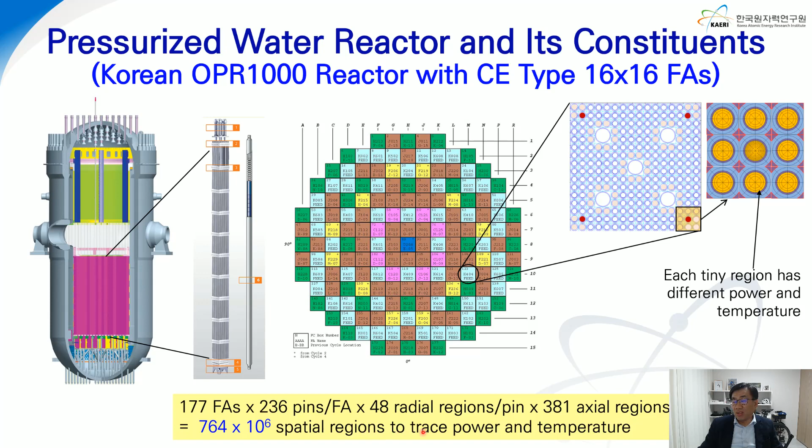The power and temperature distributions are determined as the result of the interaction between several physics phenomena occurring in a reactor. Nuclear reactions including fission, scattering, heat transfer in the fuel and coolant, thermal expansion of structural materials, and material degradation involving corrosion occur, mutually affecting each other.

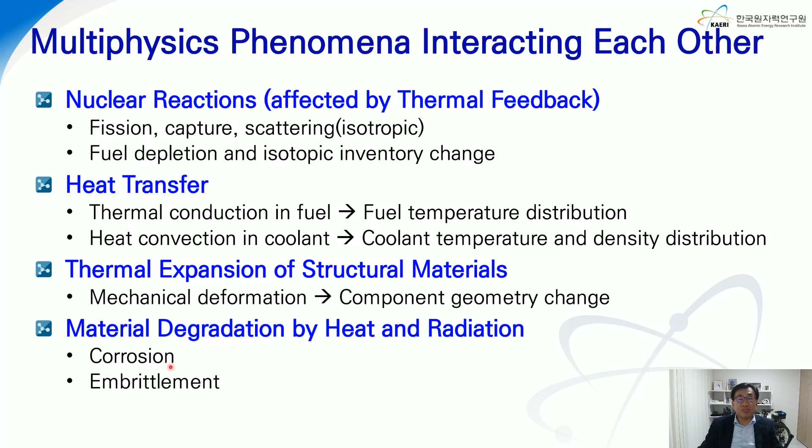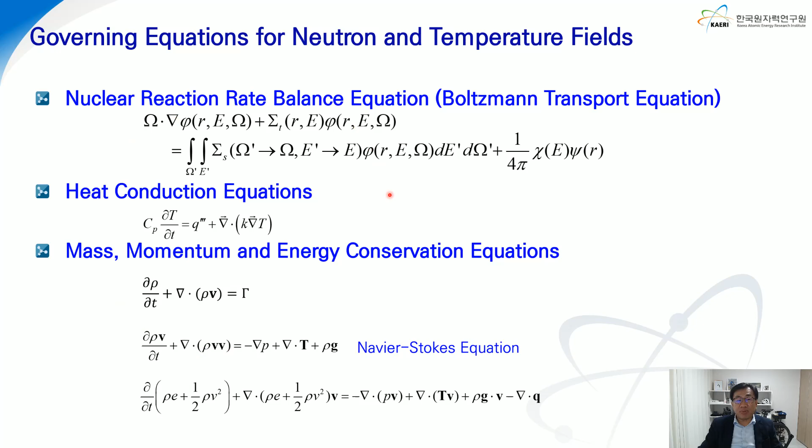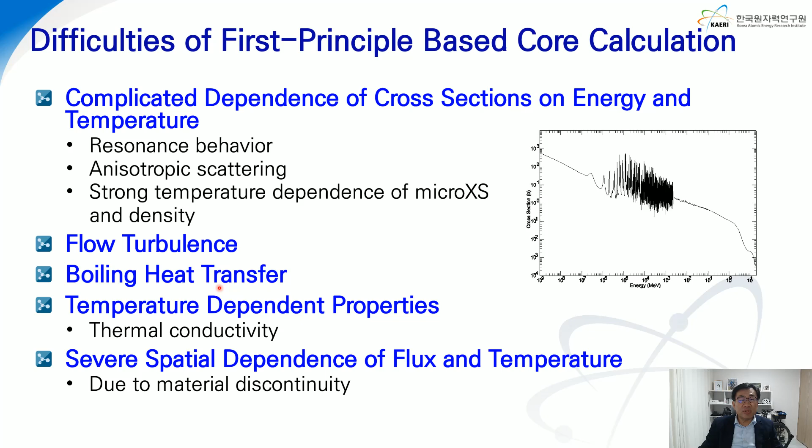The first principle-based core calculation is, however, very difficult because of several reasons. The most important reason is the complicated dependence of cross-sections on energy, as demonstrated by this resonance behavior. The macroscopic cross-section is affected by temperature through the strong temperature dependence of microscopic cross-sections and material density. In coolant, flow turbulence and boiling heat transfer make it difficult to solve the Navier-Stokes equation as is.

Therefore, several approximations and simplifications were introduced in the conventional reactor calculation. Multi-group approximation of the cross-sections, homogenization of materials in the unit of assembly, and diffusion approximation were introduced to the neutronics side. On the thermohydraulics side, various empirical correlations such as the Dittus-Boelter equation for heat transfer coefficient, drag coefficient, and turbulence mixing coefficient were introduced. Therefore, prior experiments were essential to generate these correlations.

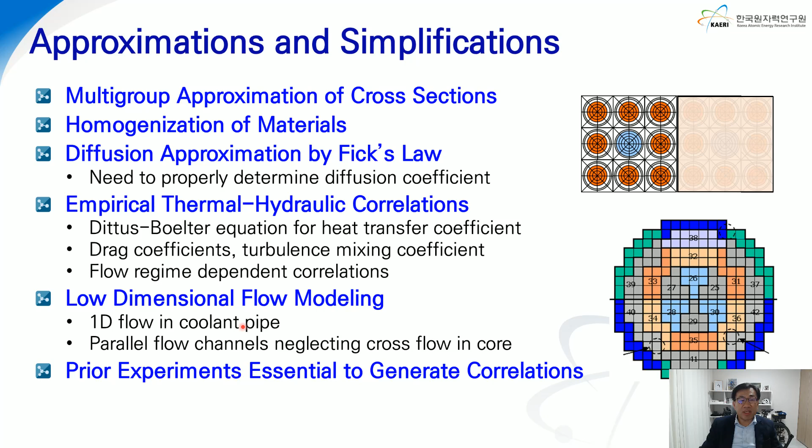In addition, simplification of the flow as 1D flow is introduced not only in the coolant pipes but also in the core as parallel 1D flow channels.

The PARCS code, which I wrote when I was a graduate student at Purdue University back in 1995, was a typical conventional reactor simulation code based on these approximations and simplifications. Even though the code was based on the two-group neutron diffusion equation, the solver must be good for accurate solution and for fast execution.

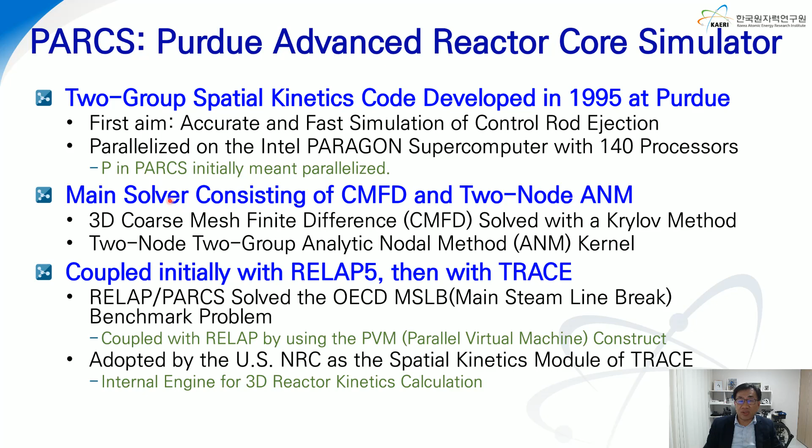This is the result of the PARCS calculation for a control rod ejection benchmark problem. It shows that the reactor power approaches the asymptotic level after the power pulse due to the strong Doppler feedback associated with the rapid fuel temperature rise.

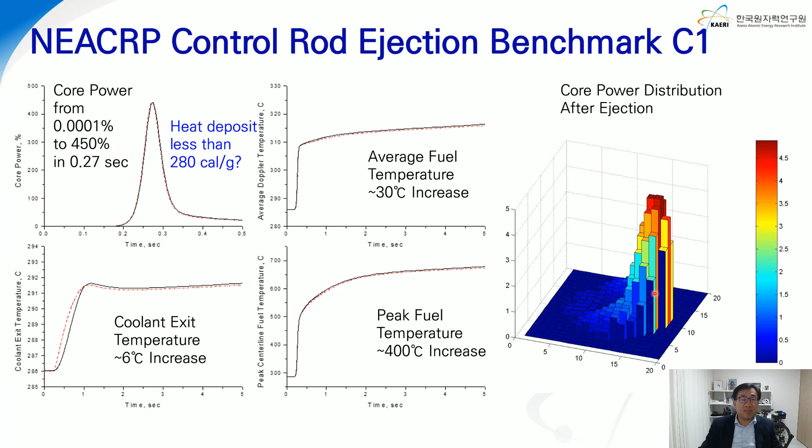This is the core power distribution, which shows a very high peak at the ejected rod position. It is noted that the power distribution is shown in the unit of core assembly, not pinwise, because each assembly is represented by homogenized cross-sections.

In 2002, it was possible to obtain a detailed sub-pin level power distribution through direct whole core calculation, which does not involve any homogenization. At the time, I led the Numerical Nuclear Reactor project as the Korean side PI of an INERI program. This project was to challenge the first principle-based core calculation by solving the Boltzmann transport equation directly for the whole core, exploiting the parallel computing power of Linux clusters. The product was the DeCART direct whole core calculation code.

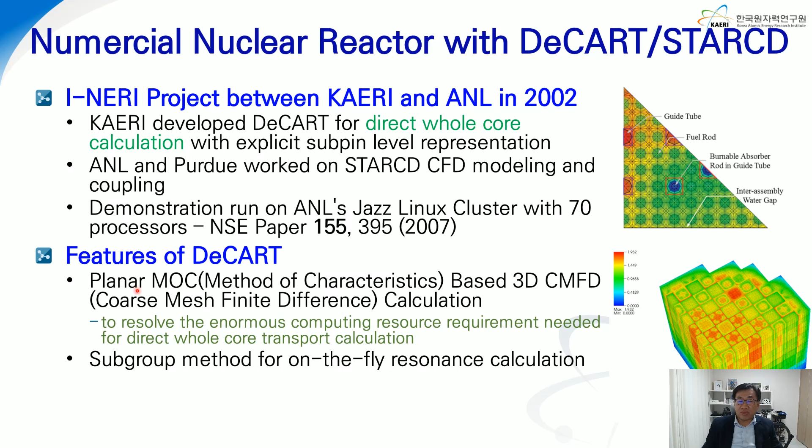Although direct whole core calculation was intended, the solution of the Boltzmann transport equation for the entire 3D domain was not possible because the computational burden is too high.

Therefore, I introduced a novel idea of performing the transport calculation for each plane by using two-dimensional MOC, namely method of characteristics transport solver. Each 2D transport solution, which is obtained with explicit sub-pin level geometry, is then used to generate pin homogenized cross-sections for each plane.

Then the 3D problem is solved with the pin homogenized cross-sections in the coarse mesh finite difference framework, namely CMFD framework. This method was named the planar MOC-based 3D CMFD calculation scheme. This was a breakthrough method that enabled direct whole core calculation on the Linux cluster at the time.

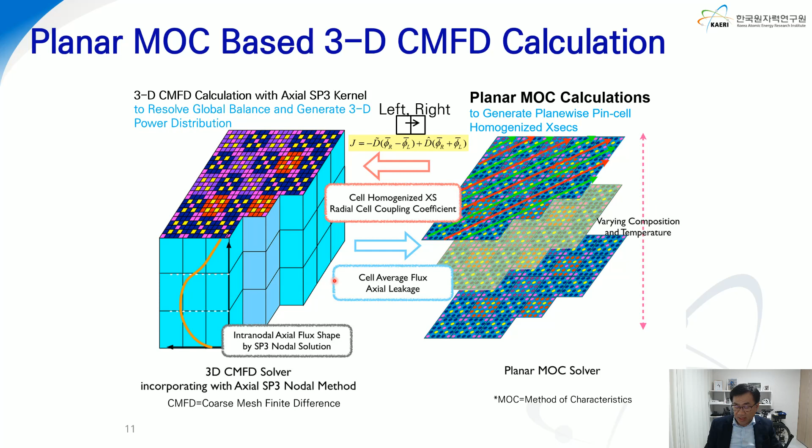Later, this method was adopted in the MPACT code, which was the direct whole core solver of VERA, developed by the CASL project. CASL project was a U.S. government-funded big project for high-fidelity multi-physics reactor simulation.

The term virtual reactor, instead of numerical reactor, was first used when they constituted VERA by combining the MPACT neutronics code, the CTF thermohydraulics code, and the MAMBA water chemistry code.

VERA demonstrated impressive performance in the simulation of so-called crud-induced power shift, or CIPS, of the Watts Bar Unit 1 nuclear power plant.

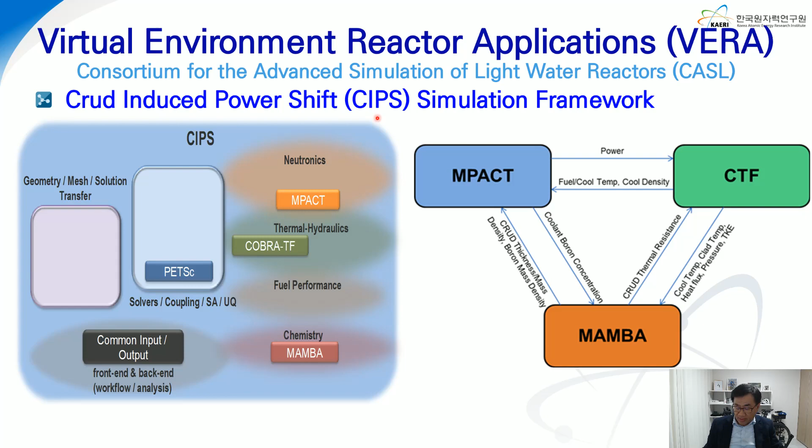In cycle 7 of Watts Bar Unit 1, it was observed that the axial power distribution is bottom skewed, meaning the power is more shifted to the bottom than predicted in the cycle design calculation. Later, it turned out that this is because of the crud formation at the top of the core, which is hotter than the bottom. The crud absorbs boron in the coolant, so boron is deposited at the top, causing the power shift to the bottom.

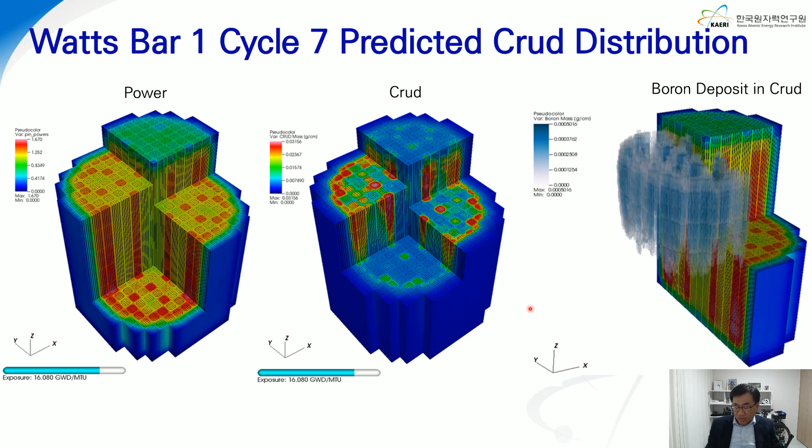This VERA demonstration of the CIPS clearly shows the value of the virtual reactor for conventional reactors.

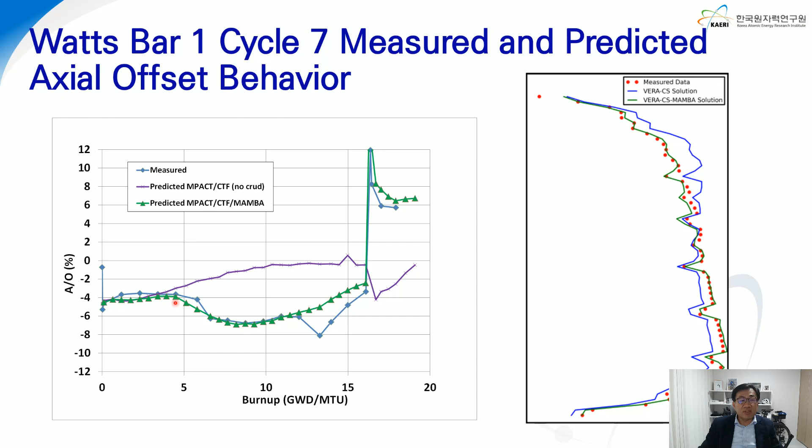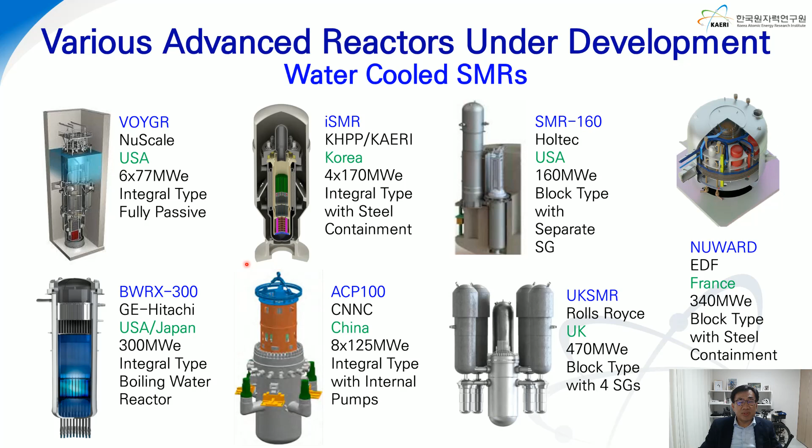This integration makes the flow path complicated so that 1D flow simplification cannot be used. Some of them do not use soluble boron, so control rods and burnable poisons are extensively used to make the core very heterogeneous. In terms of both neutronics and thermohydraulics, these water-cooled SMRs pose challenges in the core calculation.

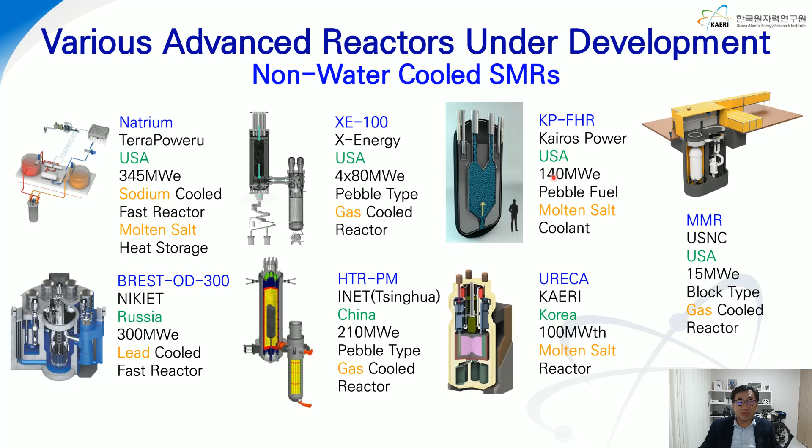The advanced reactors in general have complicated geometry with severe heterogeneity. In gas-cooled reactors, which use tiny triso fuel elements, the heterogeneity is even more severe, so that so-called double heterogeneity is present.

The cores are small, resulting in high leakage. In cores with severe heterogeneity and high leakage, diffusion theory is not valid, so transport solutions need to be obtained for the entire core.

Slow flow speed associated with passive cooling would require delicate fluid modeling. The corrosion issue in the molten salt environment must be properly mitigated. In this regard, sophisticated multiphysics modeling involving neutronics with continuous energy Monte Carlo, thermal hydraulics with CFD, and material degradation analysis with atomistic scale material simulations are required to obtain sufficient solution fidelity.

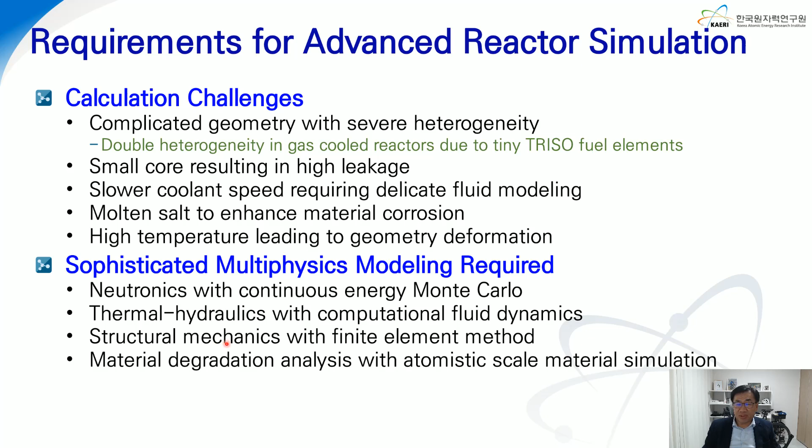All these calculation models require enormous computing power. Fortunately, GPUs, which outperform CPUs, can be effectively used to mitigate the enormous computing power requirement for high-fidelity analysis of advanced reactors.

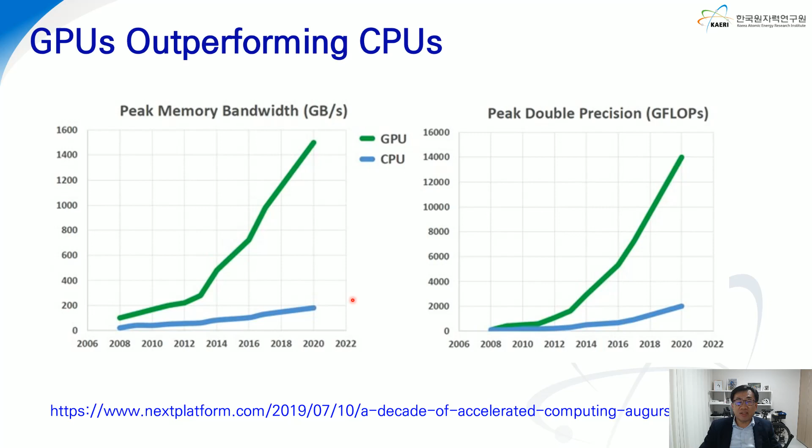GPUs can yield high computing throughput by massively parallel SIMD and vector processing. Let me show you the power of GPU in SIMD, namely single instruction multiple data mode.

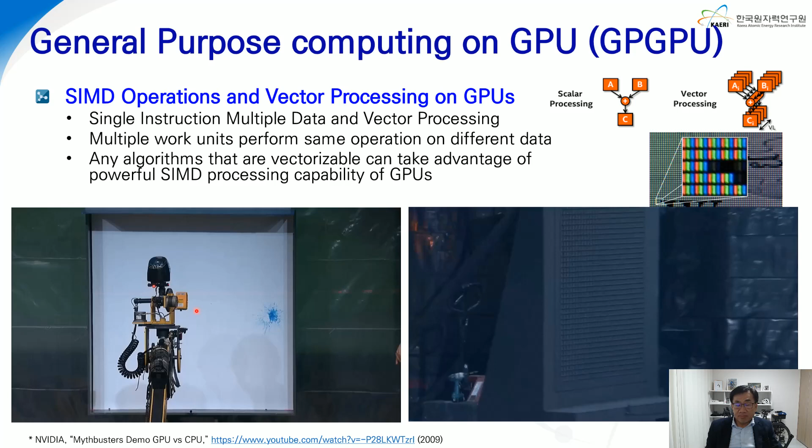Let me speed it up. This is for comparison, and this is serial mode. Now this is SIMD mode, parallel.

Ladies and gentlemen, science class is now over. The instruction to mix three basic RGB colors to produce a specific color in each cell is the same. Only the mixing ratios are given differently with different data sets for each pixel.

In order to fully utilize the superior parallel computing power of GPUs, the computer code should be carefully written to fully exploit the SIMD operation. This is a new challenge in GPU programming.

Another challenge is related to the small onboard memory of a GPU. Special care must be taken for efficient memory management.

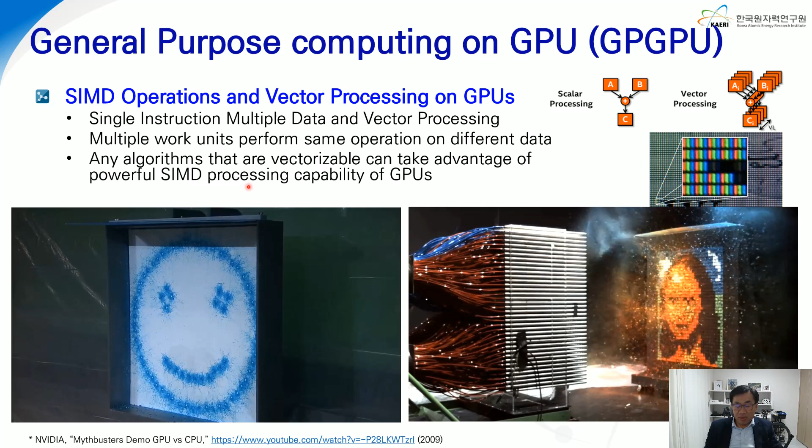At Korea Atomic Energy Research Institute, we identified the elements of the virtual reactors for advanced reactor development as this: the first is neutronics with the GPU-based Monte Carlo code, and the second is higher order DNS, namely direct numerical simulation, for the solution of the Navier-Stokes equation.

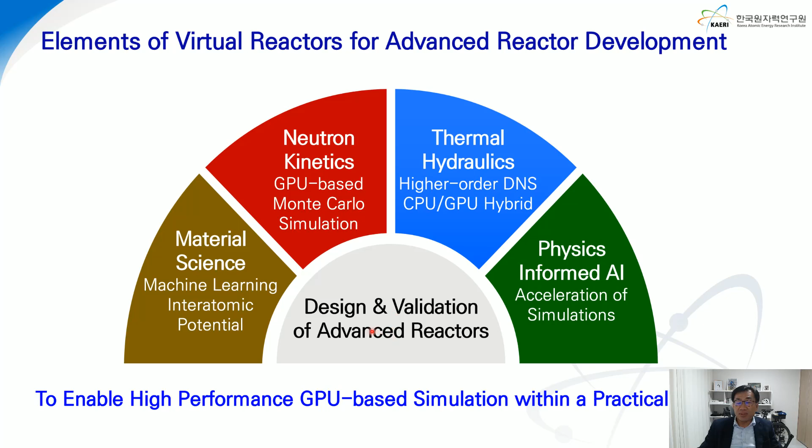The third is CFD with physics-informed AI. The fourth is atomistic material simulation using machine learning-based interatomic potential. Most of them involve extensive use of GPUs. Now let me talk about each subject one by one.

At my Reactor Physics Research Group at Seoul National University, we have been developing a GPU-based Monte Carlo code with thermal feedback for superior computing performance in power reactor calculations.

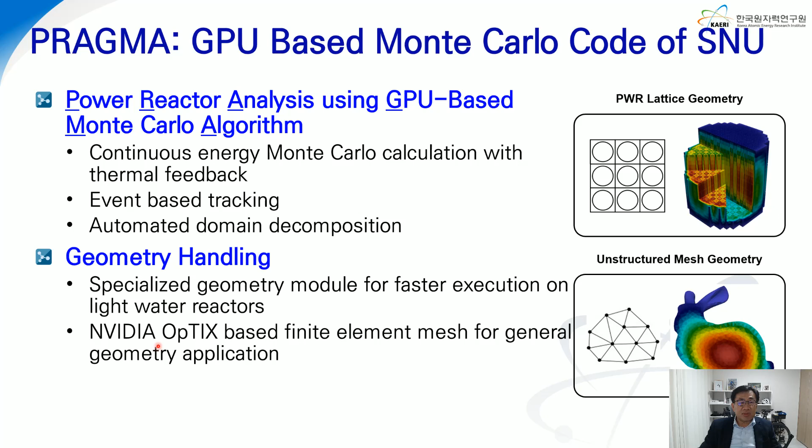It has a specialized geometry module for fast execution in regularly structured cores. For general geometry application, it uses finite elements and the OptiX ray tracing engine of NVIDIA. In order to maximize SIMD programming, many innovative methods, including event-based tracking, were developed. Also, efficient memory management was achieved by automatic domain decomposition.

In most Monte Carlo codes, the history-based tracking scheme is used. This lets each calculation thread track a neutron, which would yield its own collision history that will be different from others. Then each thread should execute different instructions because the collision of each neutron is random. This is not SIMD operation.

On the contrary, in event-based tracking, neutrons undergoing the same event, such as capture, scattering or fission, are processed together by the same instruction. By a sorting algorithm, it is possible to collect neutrons undergoing the same event. This is to fully utilize the SIMD operation. In the event-based scheme, one computing thread will track different neutrons at different times.

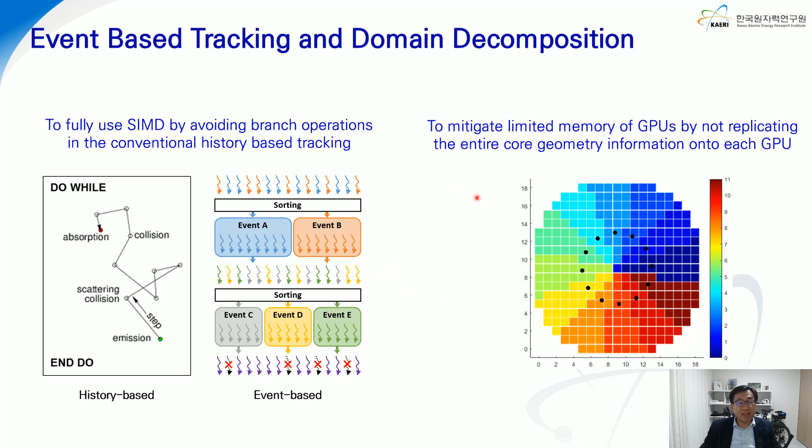The automatic domain decomposition scheme, as shown here, is also essential in GPU computing because the memory on a GPU card is not enough to contain the whole geometry information of the whole core. These two examples show that elaborate programming is essential in GPU computing.

Pragma's superior computing performance was verified through the BEAVRS real core benchmark problem. By using 24 commodity GPUs, the two-cycle depletion calculations with full thermal feedback could be completed within a day. Of course, the results are very accurate and detailed. No Monte Carlo code can perform this fast calculation at this low cost.

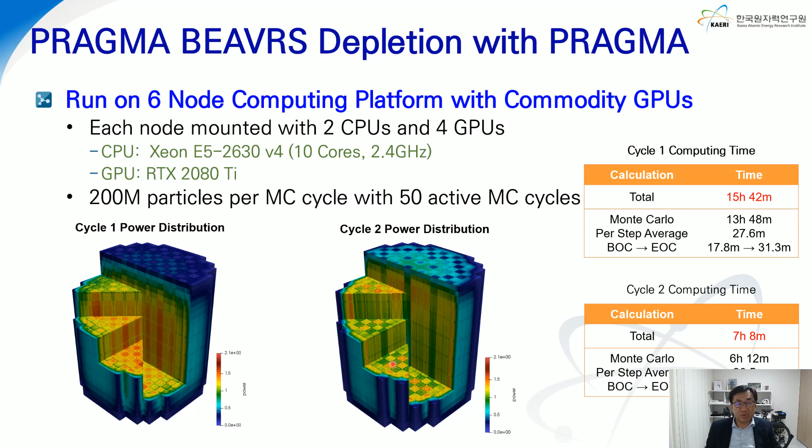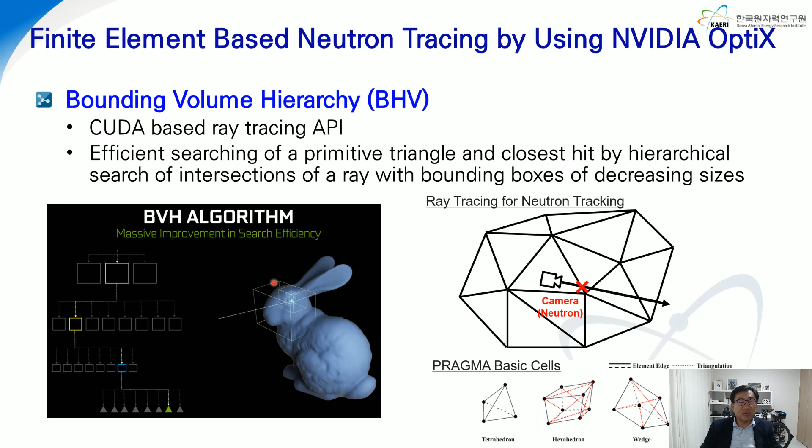In general geometry representation in Pragma, all the objects are represented by finite elements of these three types. The OptiX ray tracing module in CUDA is used to trace neutrons instead of light. OptiX provide a very efficient searching tool for finding the next intersection of a neutron track with an element by the so-called bounding volume hierarchy algorithm.

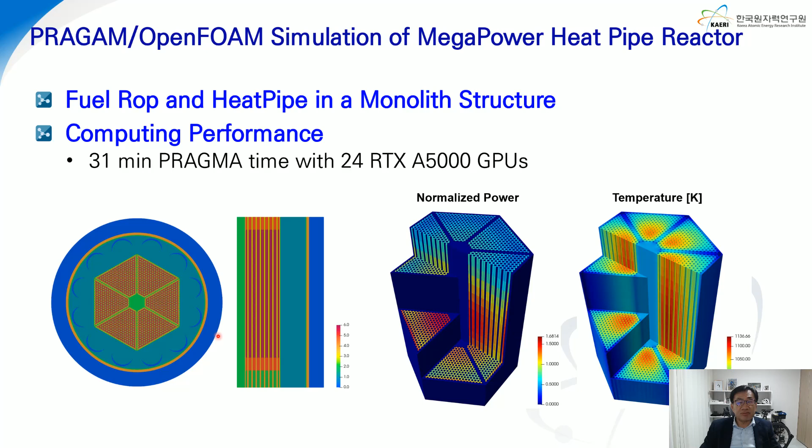This is the result of the Pragma calculation performed with OptiX ray tracing for the megapower heat pipe reactor, in which fuel rods and heat pipes are placed in a monolith structure. 31 minutes with 24 GPUs was enough to obtain this power and temperature distribution.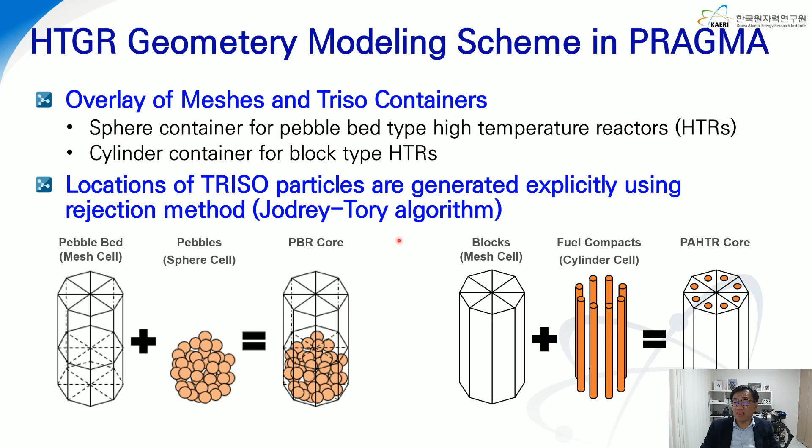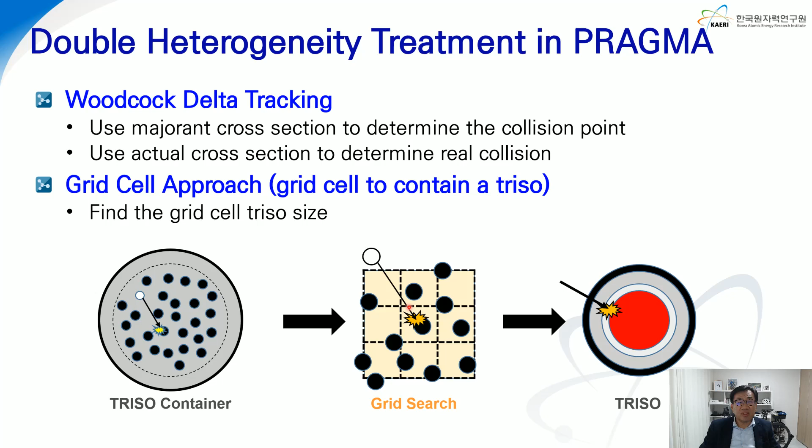The three-layer material within each TRISO is explicitly represented as well. The delta tracking scheme is used to avoid overly frequent TRISO region searches. This is the Pragma result for a block type gas-cooled reactor. The calculation time is only 2 hours with 24 GPUs.

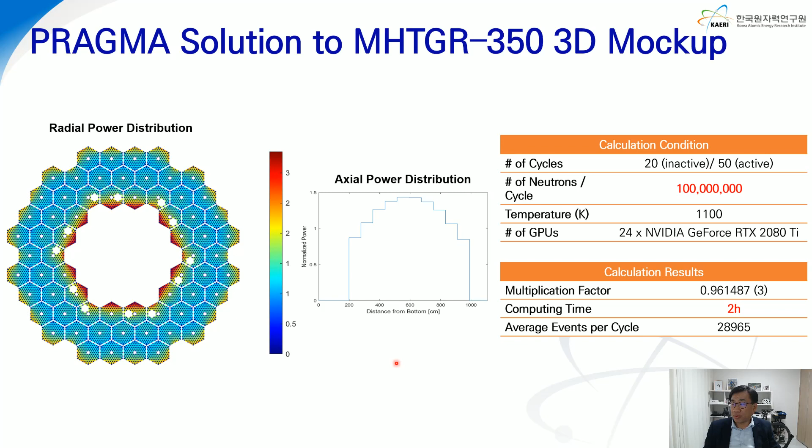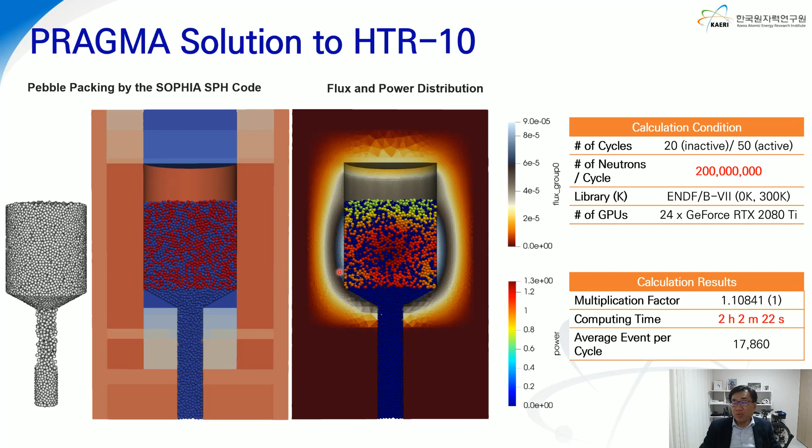This one is the Pragma result for a pebble bed type reactor. The location of each pebble was determined by the SOPHIA smoothed particle hydrodynamics code, which can simulate the pebble packing like this. This is the resulting pebble distribution, and this is the power and flux distribution. In the graphite reflector represented by finite elements, only flux distribution is shown.

Now let me move to the topic of direct numerical simulation for the solution of the Navier-Stokes equation on GPUs. In most CFD codes, the RANS, namely Reynolds Averaged Navier-Stokes model, is used. RANS involves averaging of the Reynolds stress terms, and empirical models are employed to properly represent the stress term in various conditions. DNS is required to avoid using the empirical term, but DNS requires extremely small finite elements in general, so it takes a huge computing time.

If a higher order method is used to represent the internal variation within an element, larger elements can be used for the same extent of accuracy. However, with the higher order approach, the solution for each element would cause an increase in computing operation. This increase in element-wise computing operation is well suited to GPUs.

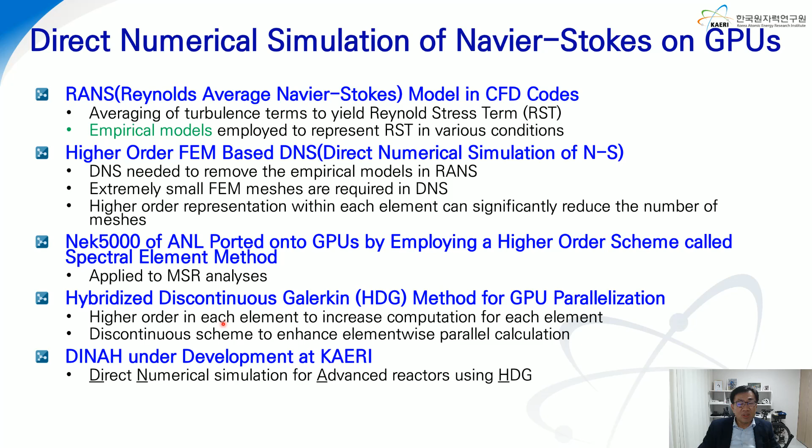At Argonne National Lab, they ported the NEK5000 CFD code onto GPUs by employing a higher order scheme called the spectral element method, and it was applied to molten salt reactor analysis. At KAERI, we are investigating the hybridized discontinuous Galerkin method for more efficient GPU parallelization of DNS. It is named DINAH, which stands for Direct Numerical Simulation for Advanced Reactors using hybridized discontinuous Galerkin method.

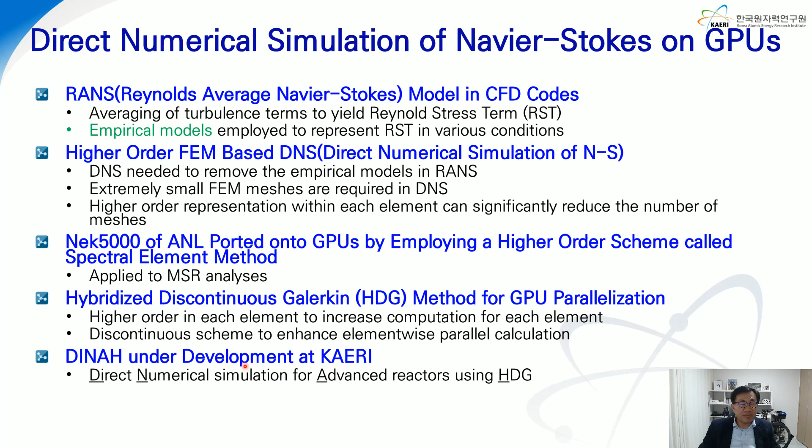This shows the effectiveness of DINAH in a driven cavity problem. With the 6th order, only 18 coarse meshes were enough to reproduce the fine mesh solution as shown here.

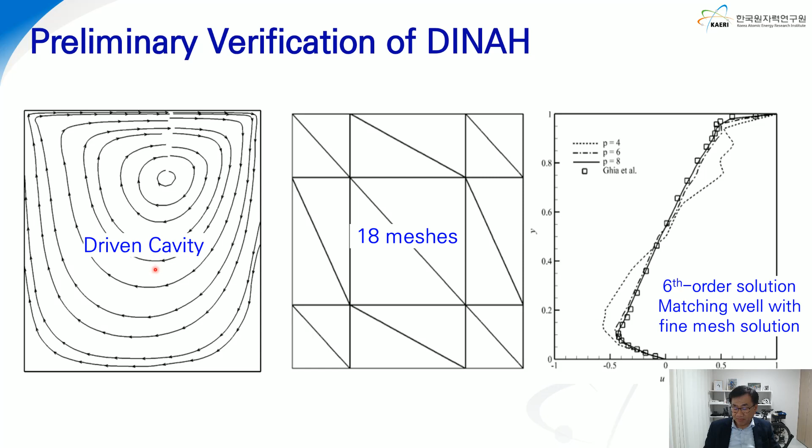Now let me move to the next subject involving machine learning. GPUs are known to be adequate for neural networks. For training a neural network, either model parallelism or data parallelism can be applied. Model parallelism is to use a GPU in a different layer of a neural network. This is needed to construct a big neural network for deep learning.

Data parallelism is to use the same neural network in different GPUs. It is to use each GPU to train with different input sets. This is for big data applications.

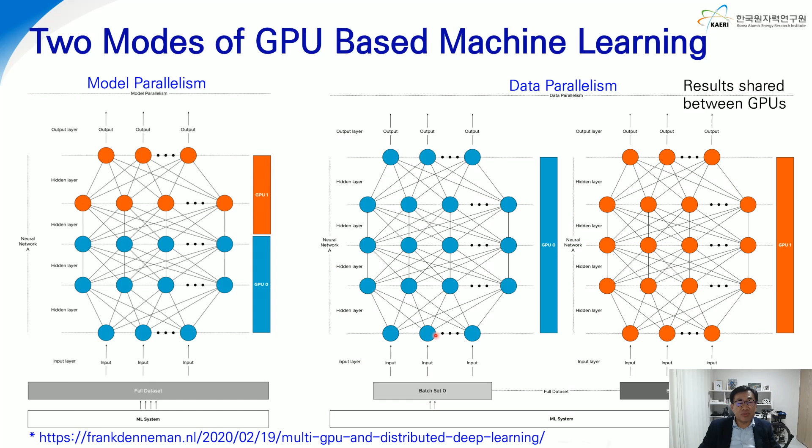When solving a physical problem in which a particular physical governing equation can apply, it would be better to train a neural network with the physics constraint. It is called physics-informed machine learning.

Once a neural network gives a trial output set consisting of spatial distributions of physical quantities, the output set is given to a residual evaluator network which can evaluate derivatives from the distribution and calculate the residual, the difference between the left and right hand side of the governing equation at each spatial point. The residual information is fed back to the neural network so that its parameters are adjusted to minimize the residue. This is one way of physics-informed machine learning.

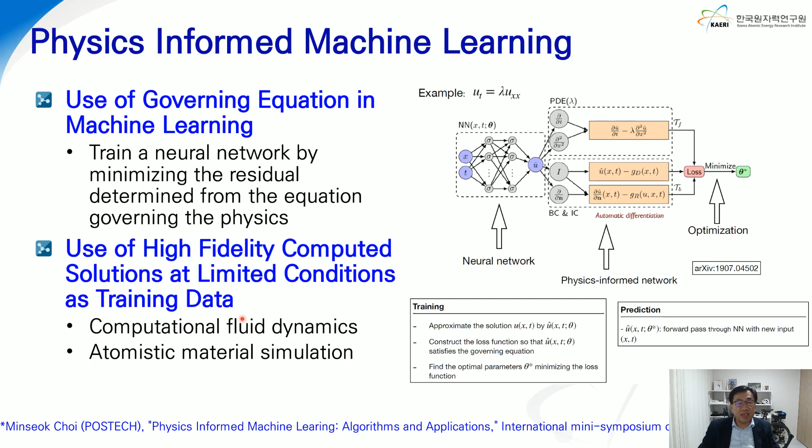The basic training data are generated from high-fidelity computed solutions at limited conditions. CFD is a good area of physics-informed machine learning.

This is an example which involves 10 CFD solutions for a 2D flow around a cylinder. Four CFD solutions were generated with different aspect ratios of the cylinder, three with different angle of attack, and three with different viscosities.

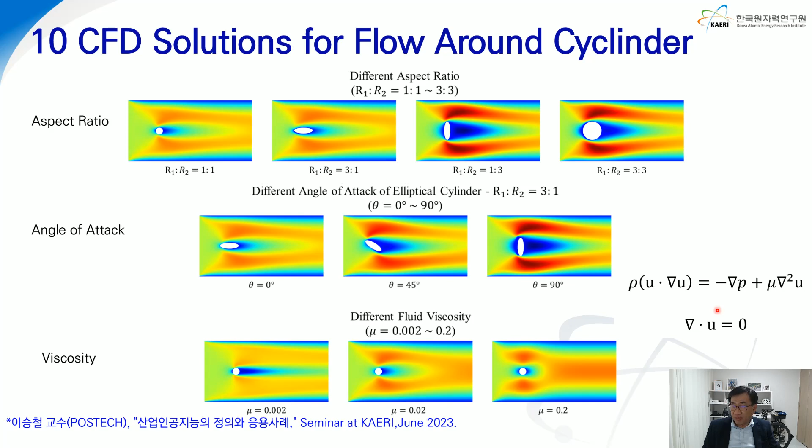These are the two governing equations of the flow which will be used for the residual evaluation through differentiation. These videos compare the goodness of physics-informed machine learning for continuously varying angle of attack, aspect ratio, and viscosity.

The result shown above was obtained by training with the 10 sets of data only. The bottom ones were trained with the data and physics as well. Obviously, the bottom ones are much closer to reality.

Atomistic material simulation, represented typically by molecular dynamics, is used to predict material characteristics such as impurity behavior or solubility.

For molecular dynamics calculations, an interatomic potential, shown here, is used in the solution of the Newton equation of motion for a group of atoms given in a lattice structure like this. The interatomic potential can be obtained by quantum mechanics calculation, which takes a lot of computing time.

Machine learning can be used to generate interatomic potential from some selected structures, illustrated with big circles here. The red lines are those generated after machine learning on a neural network.

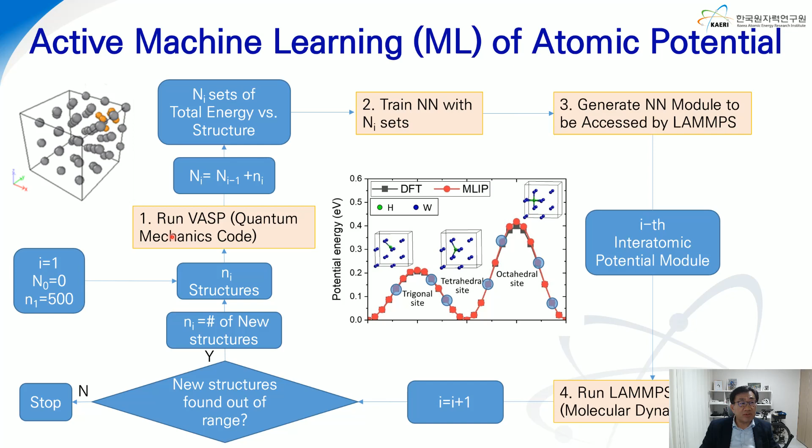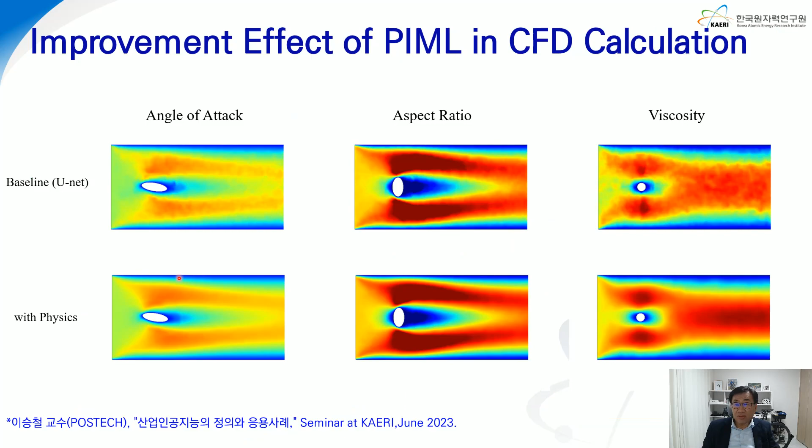This movie demonstrates the molecular dynamics simulation of liquid sodium with gas oxygen. The interatomic potential for this calculation was obtained by active machine learning.

Once this kind of molecular dynamics calculation can be readily performed, a large number of combinations of liquid metal elements can be examined to find an alloy that has benign characteristics, so it can be used in new material development.

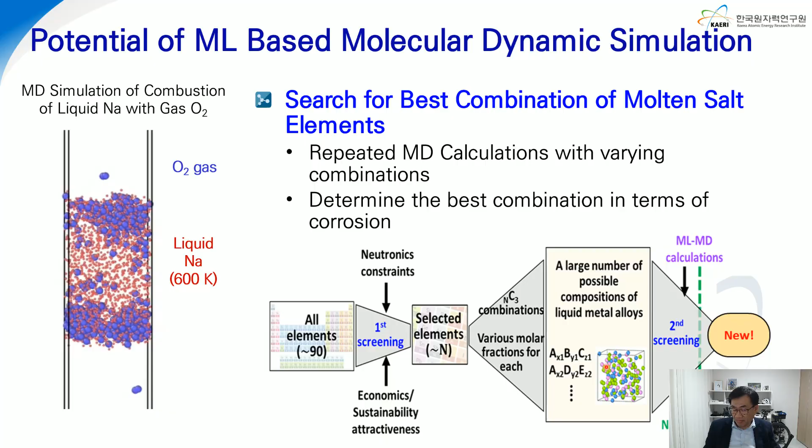Finally, let me show you a digital twin of the Korean APR 1400 power plant. It is a replica of a real plant and was generated from the CAD drawings.

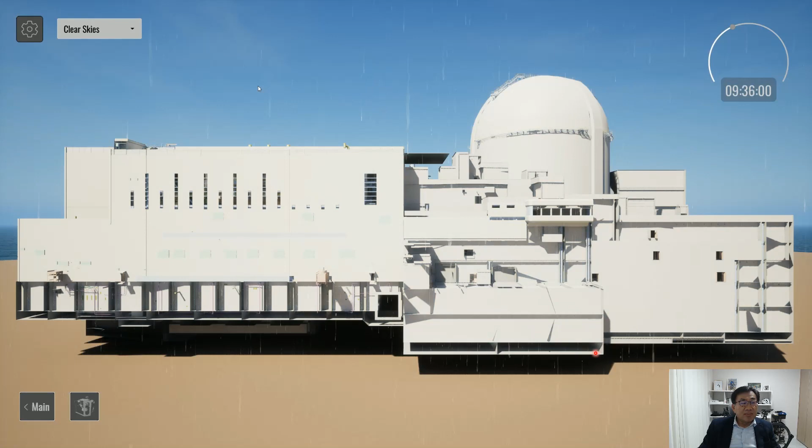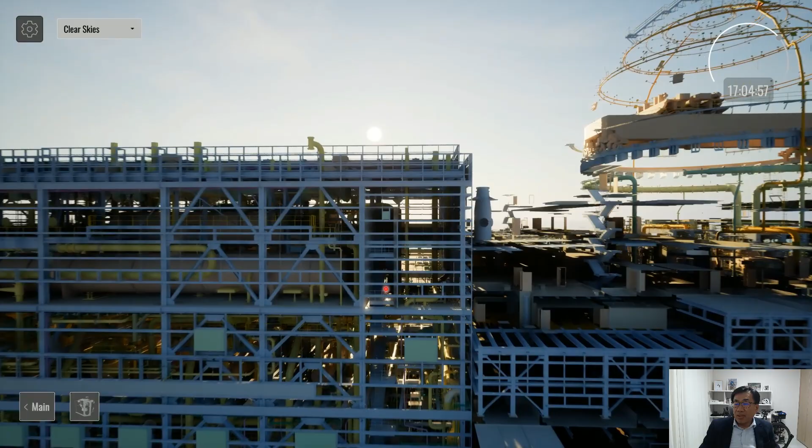By integrating monitoring data and simulation engines, the local states of the plant can be realistically followed. Now let's go into the turbine building, and we'll soon see the pressure and temperature at the inlet of the turbine and also at the outlet of the turbine.

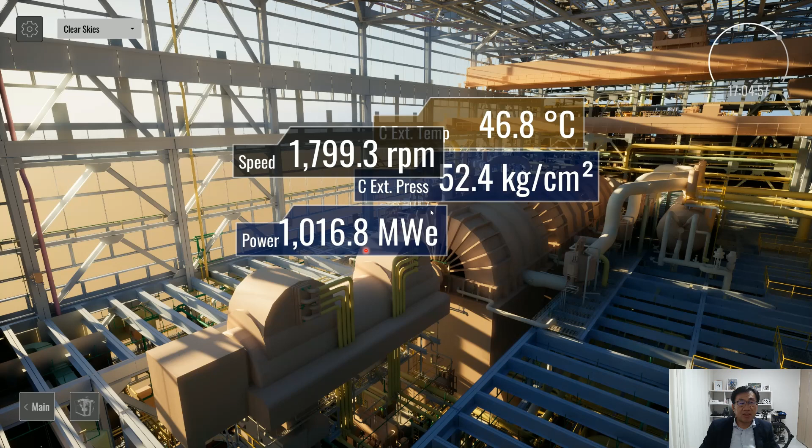The maintenance record can also be accumulated for each part. This kind of digital twin will help the safe and high performance operation of the plant.

Now let me conclude. By exploiting the increased computing power, it is now possible to build a virtual reactor with first principle-based modeling and simulation of each physical phenomenon. Examples are Monte Carlo neutronics, DNS of Navier-Stokes, and atomistic material simulation.

The virtual reactors will be useful for accelerating advanced reactor development by saving time and resources needed for experiment.

The enormous computing power requirement can be resolved by using GPUs and elaborated programming. Proper SIMD-based parallelization and efficient memory management are necessary to fully utilize the capability of GPUs. Machine learning can also be a promising way.

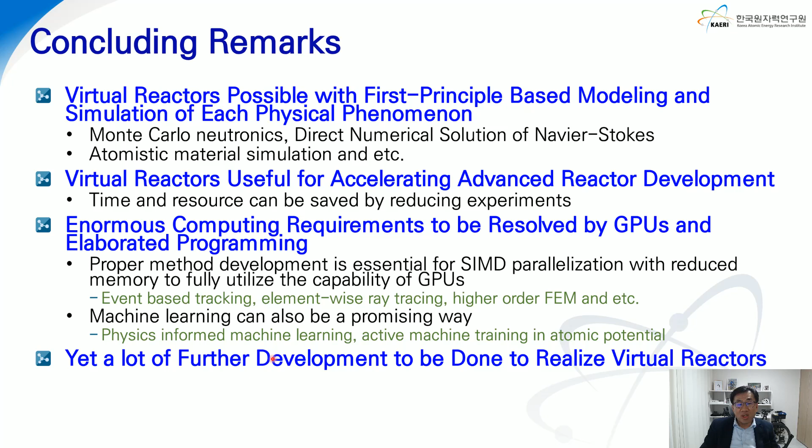Yet, a lot of further development ought to be done to realize virtual reactors, and it is up to you, young folks. Thank you for attention.

While you are thinking of the questions, let me show an additional digital twin of APR 1400.

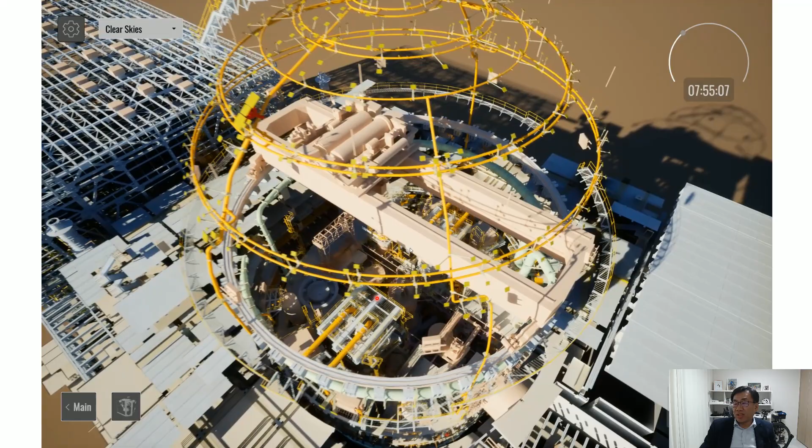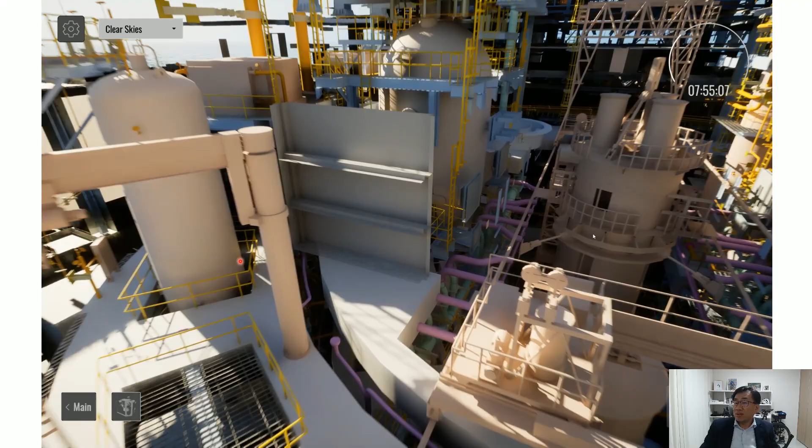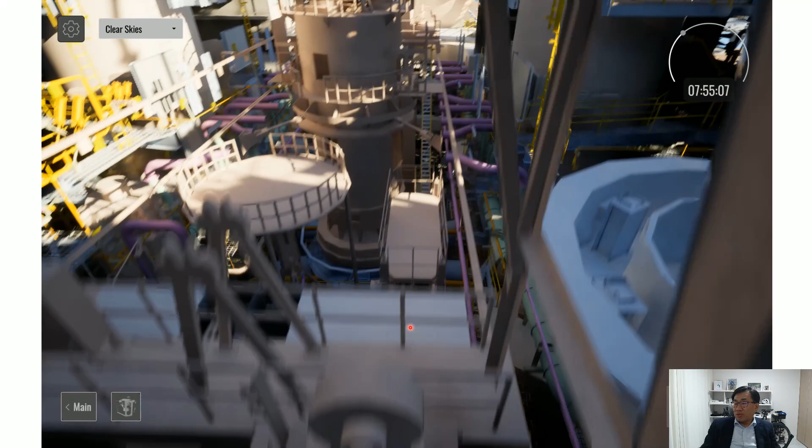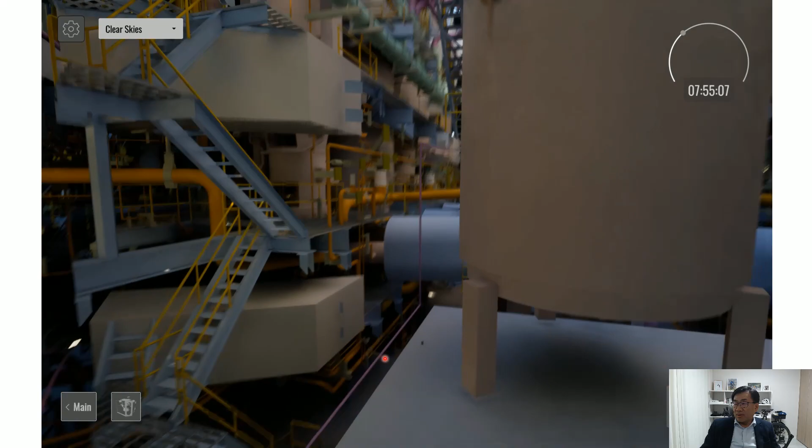So now we'll go to the bottom of the reactor. If you go down further, we'll see the internal refueling water storage tank inside.

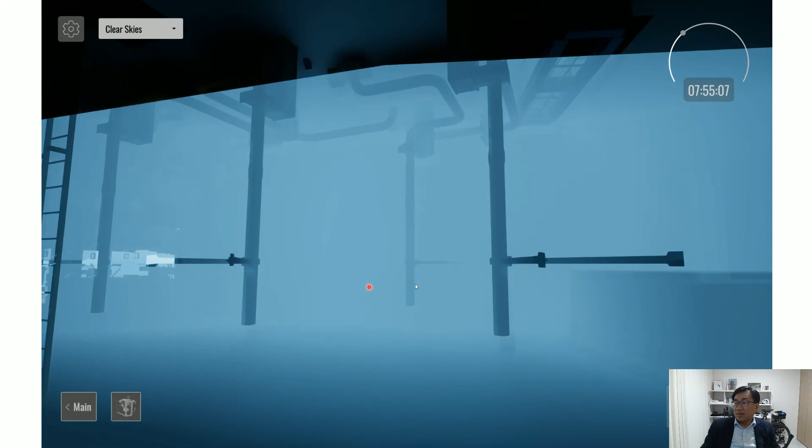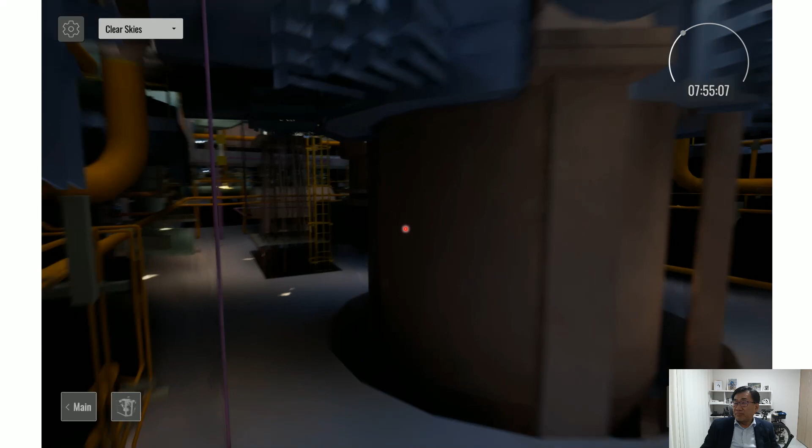Anyway, I think this is fascinating. The digital twins can be made as accurate as this.